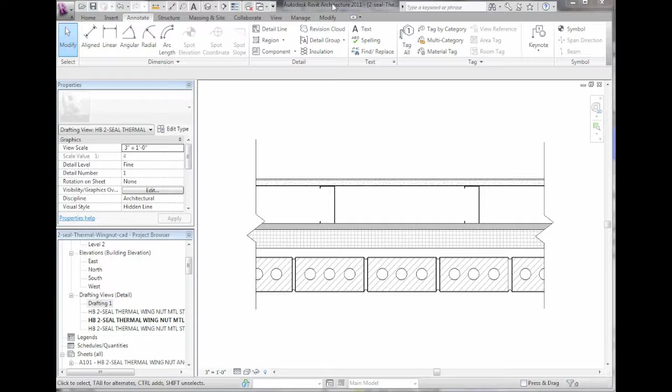If a designer is going to use a product like this, there are a few things they've done traditionally. One is to draw the product themselves, which involves drawing a series of lines and filled areas to create an anchor. That works and has worked in the past, but it takes time, it never looks quite right, and there's no embedded data in it—no advantage marketing wise or branding wise.

So one thing that's happened over the years is people have developed CAD details. Traditionally they'd end up on a website, you'd download that product CAD file, and once you do that, you'd open a blank sheet, say insert, import CAD, and grab the actual CAD file, and it would come in.

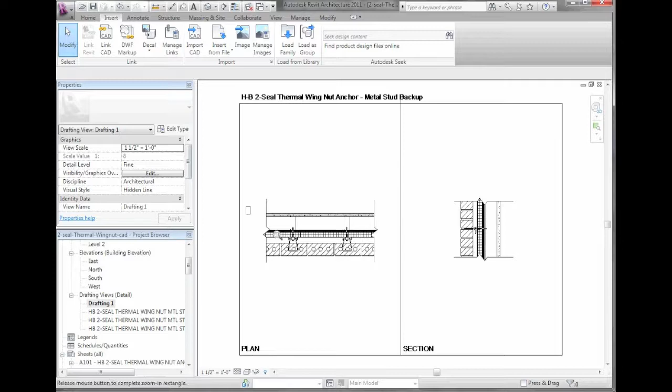This one I just made, so it's going to look the way we want it to look, but you never know what you're going to get, and depending on how it was drawn, it can be hard to work with. When I select it, I get the whole thing, so I have to do an explode to break out the sections and parts. This one came out quite well in this instance.

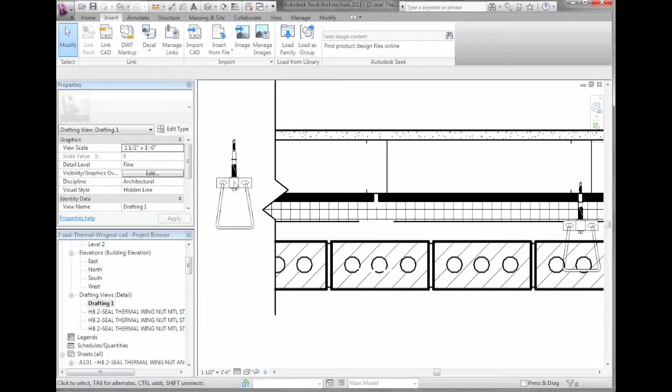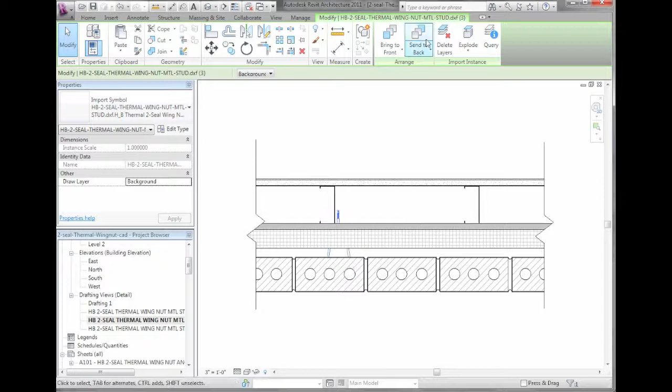Here's the actual top view of the thermal wing nut. I'll copy it, bring it to my plan view, and paste it in. Right now this thing is hiding underneath other things, and even if I say bring to front, it's not quite working right. So that's the way things have been done in the past.

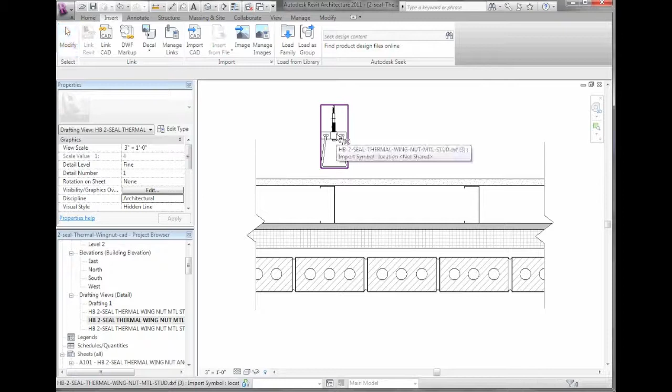But more and more people are using Revit to do their building designs because it is BIM, it's effective, it's time efficient, it's collaborative, it's 3D—all these things. So if we can take advantage of that—and I'm really excited about this, a lot of firms are using this—if they go to your website and download one of these Revit 2D detail or components, all they'd have to do is load the family and find it. These are nice because they're organized by CSI divisions.

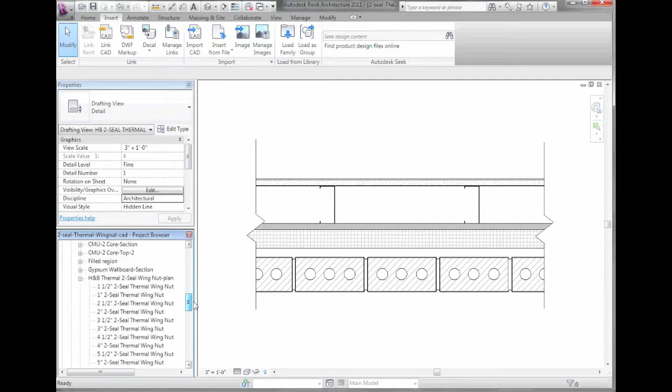I can say detail components, open that—it's giving me trouble right now, but that's okay. What I can do is come in and insert this actual wing nut, and now I can see it here. I'll drop it about where I need it to be, then get closer and adjust it just a little bit.

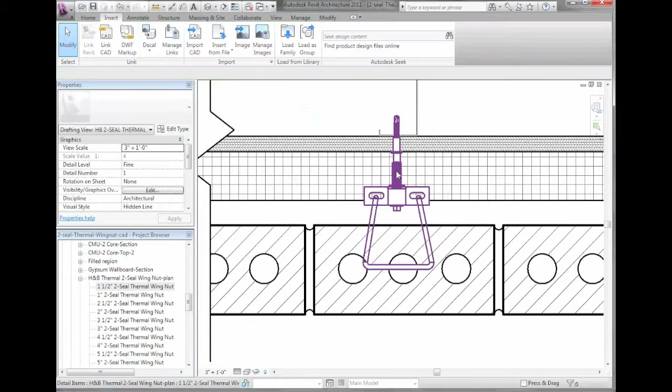Now what I have here is options. When I open up this file, I can see it's the H&B Thermal 2-Seal wing nut, with several types depending on size. I'll choose a 2-inch, and I can see it's 304 stainless steel. I've got a link here to the actual submittal sheet on the website, so I can get all this information just by clicking that.

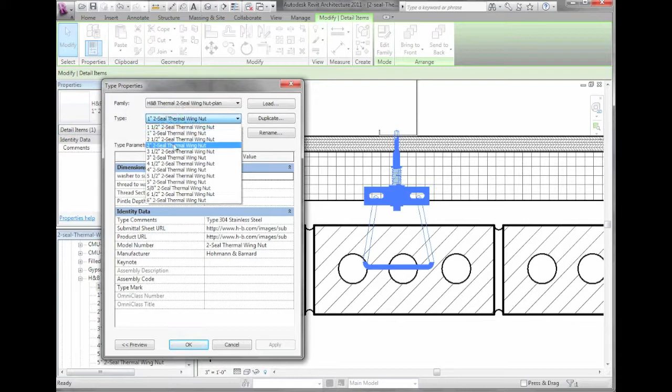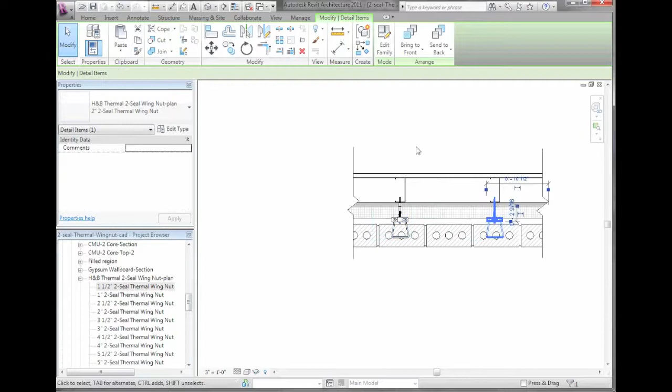I'll come back, say OK, and I still need to find the right size—right now I have 1 inch. I think I need to select the 2-inch size, fit it in there, and now I've just inserted this product into my drawing that easily. I'm going to copy it once because I know it's got to be at 16 inches on center. There we go.

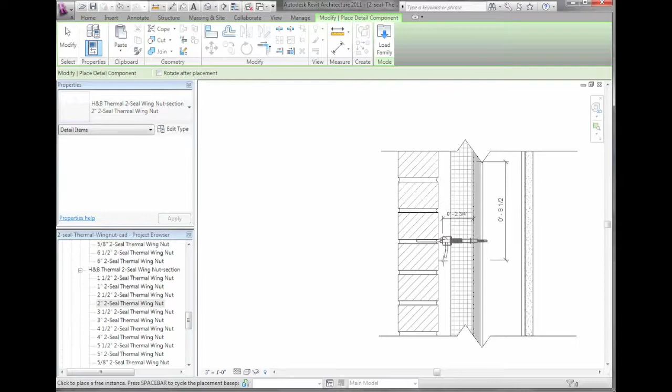Now I can do the same thing for my section. You can find the section—there it is. I'll go to the thermal wing nut section detail component, pull that component out, drop it in just about where I think it needs to be, zoom in, and do some adjustment.

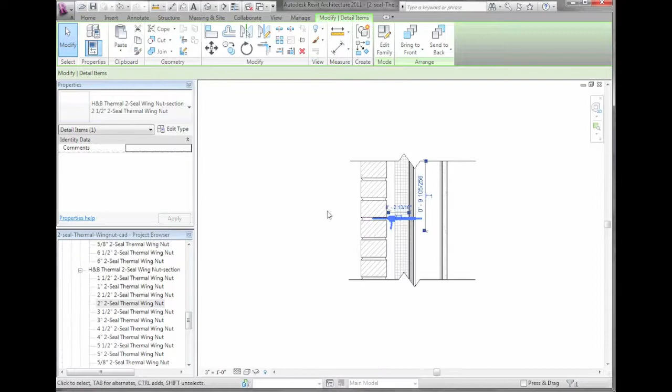You can see the size of the insulation I use. Let's say I have a thicker or a thinner insulation—I'll change this to 1.5 inch insulation. All I really do is come in and tell the wing nut to be 1.5 inch, and make sure it's in there at the right spot.

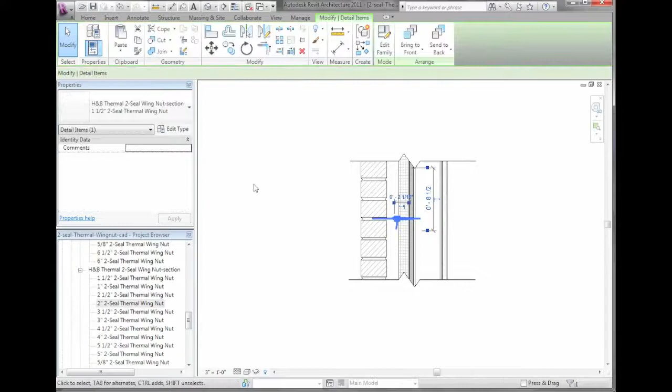The beauty of this is once it's put in the project, it's there—all the data, all your information is in there. Your name is in there, your link to your website page. All I do is click it and I'm taken there. Very simple, very efficient, and we know our product's going to look the same every time in everybody's drawing. I'm really excited about this.